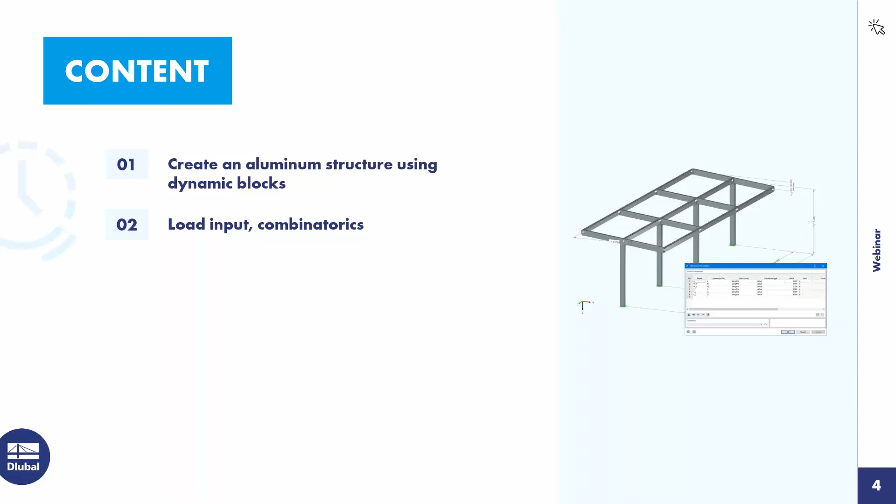I come to the agenda. First point is creating an aluminum structure using dynamic blocks. Then load input and combinatorics. Then the design of the structure according to Eurocode 9. And finally the printout report documentation.

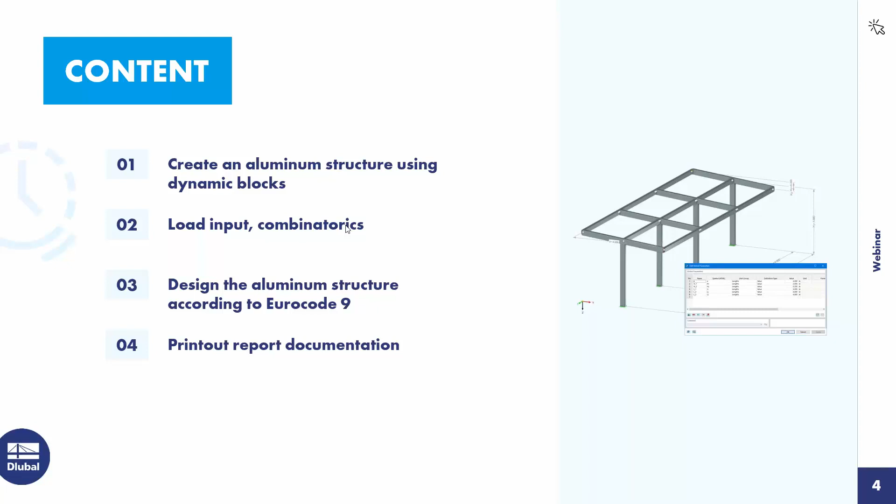Thank you, Andreas. I would also like to welcome you to today's webinar. This construction can be modeled by entering objects in graphic or tabular form directly in RFEM. This has already been shown in detail in previous webinars. In addition, there's also the option of saving object groups as a block and then reusing this block.

In RFEM, 3 block types are distinguished: non-parametric blocks, parametric blocks, and blocks with JavaScript. I would like to introduce you to all 3 block types.

In the case of a non-parametric block, the structure has been created without parameters. The model that you see here was created this way. Here the node coordinates are defined by values; no formulas are used.

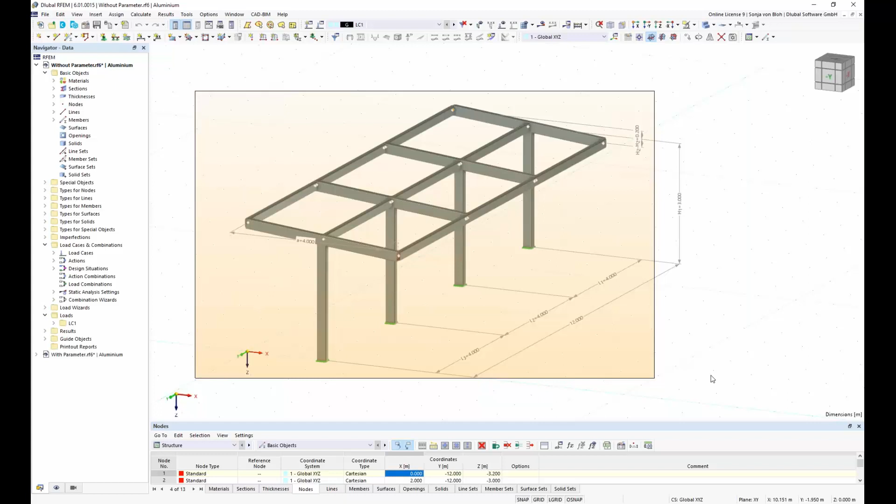In order to save the structure or partial structure as a block, it must first be selected. I want to save the entire structure as a block, so I select the entire structure. Then I go to File and then Save as block. Here I have to enter the name and I also have the possibility to do a classification.

The classification is used as a filter so that I can find the block more easily. A few categories have already been created. Here I choose the category beams.

The block can now be inserted into any file. I insert the block into the same file. For this, I open the Dlubal Center blocks that manages these blocks. Here many blocks are included. You can see here the beams, then you can use the tower and masts and so on for your daily work.

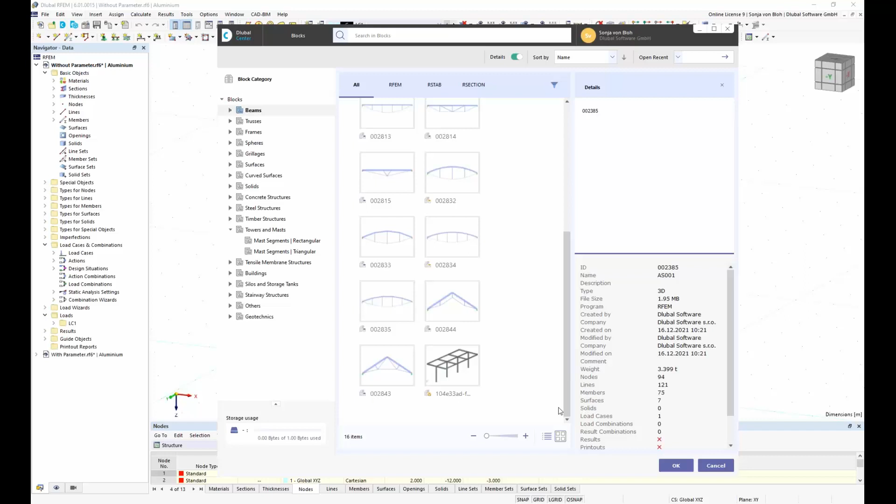I first switch to the filter in which I saved the block, and then I select the block. I find it here. Then I go to OK.

In the main tab, I can set the insert point of the block by choosing the node in the graphic, or I can choose the node in the drop-down here. Then I can define the position of the insert point. If I write the coordinates here, I also have the possibility to pick this coordinate in the RFEM work window.

In the Structure tab, I can change the material, the section, and nodal support. This information was read from the construction which I saved as a block. If I want to change the section, for example, I can click on the 3 points here. This opens our section database, and I can use any section included in this database.

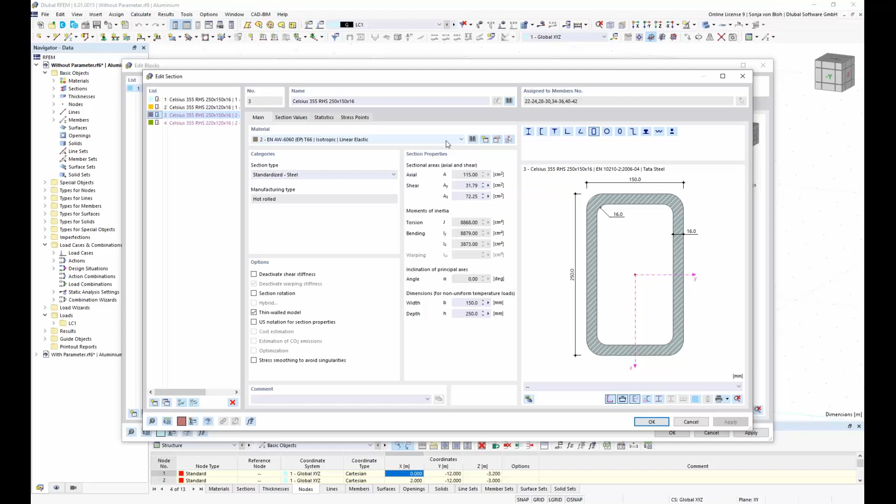I now click OK, and the block will be inserted into the file. The block reference is not lost; I can edit or convert the block to normal geometry.

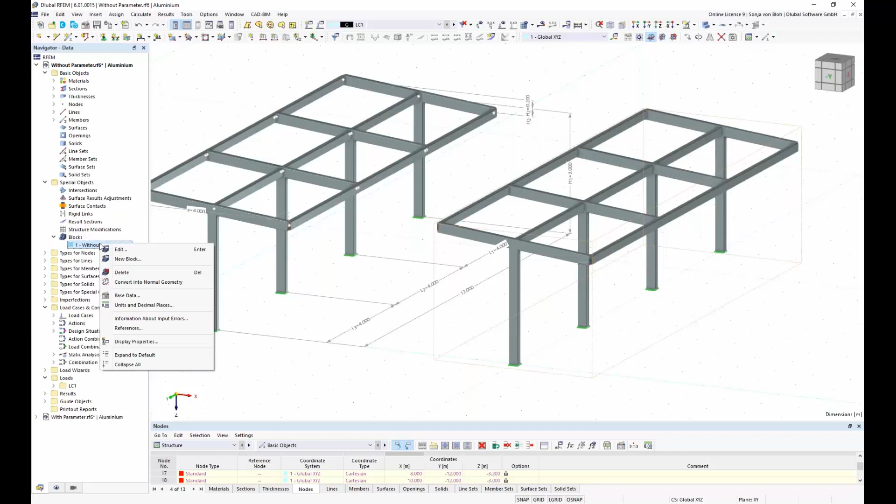I find the block here in Special Objects, blocks without parameter, and if I want to edit this block, I choose the Edit button, where I can edit the coordinates or the structure. If I change the coordinates to 15 meters, the block will be moved, as you see here. There's also the possibility to use this function directly in RFEM, moving the block by drag and drop.

That's all to the blocks without parameters. In the case of a parametric block, the construction has been entered in such a way that the structure depends on parameters. I've prepared such a model that you can see here. In addition to the geometry, loads can also be parameterized. The parameters can be set in the global parameters window.

Here I have already created the lengths A, H1, H2, L1, L2, and L3. They have the unit group lengths, but I can choose another unit group as well. Here you have forces and moments and so on if you want to use parameters for forces or for loads. Then I've selected the definition type value. You have here also the possibility to use formulas.

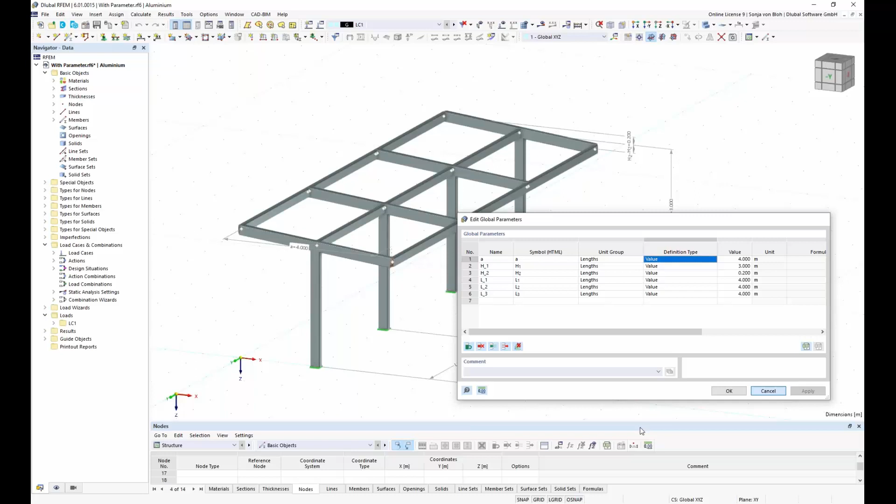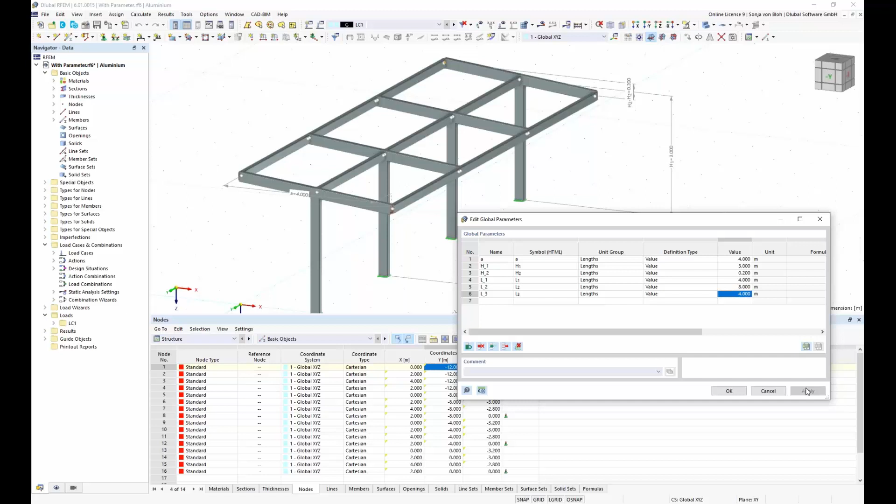I have defined the coordinates using these parameters via a formula. You can open the formula if you click on this symbol here. And here you can see the node coordinate y is calculated as minus L1, minus L2, minus L3. If I now change the parameter, then the structure will be changed. I can change it also back.

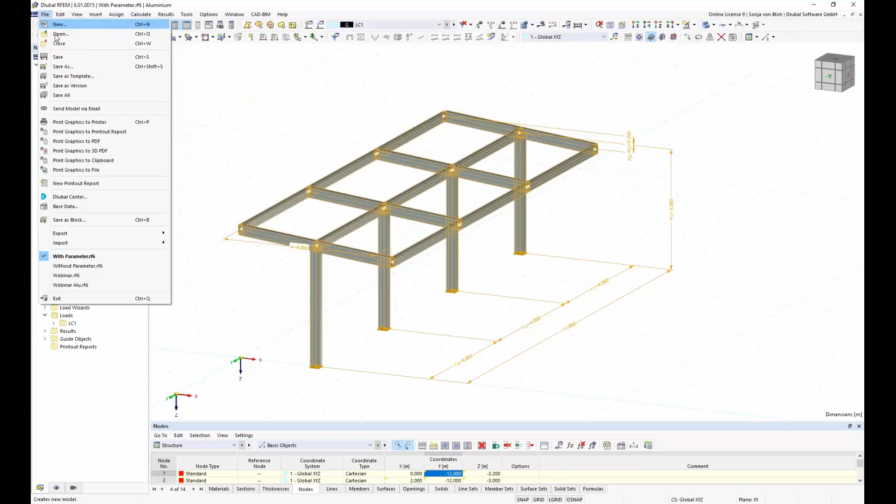If I now want to save this structure as a block, I have to select the structure again. I want to save the entire structure, so I select the entire structure. Then I go to File, Save as Block, give it the name with parameter and also the model category beams. Click on OK. And then I will insert this block into this file.

For this, I open the Dlubal Center blocks. And in the filter beams, I find this block. And in the main tab, I can do the same things like in the other block. I can choose the insertion point. And then I go to the structure. Here I have the same possibilities like in the other block. I can choose the material, the cross-section and the nodal support.

But in addition, I have also the global parameters that I have defined in the structure before. And here I can change these lengths as I want to. I click on OK. And the mapping to the global parameters is lost. If I insert this into the file, I can see this if I change the global parameters. Click on OK. Then only the structure with the global parameters will be changed.

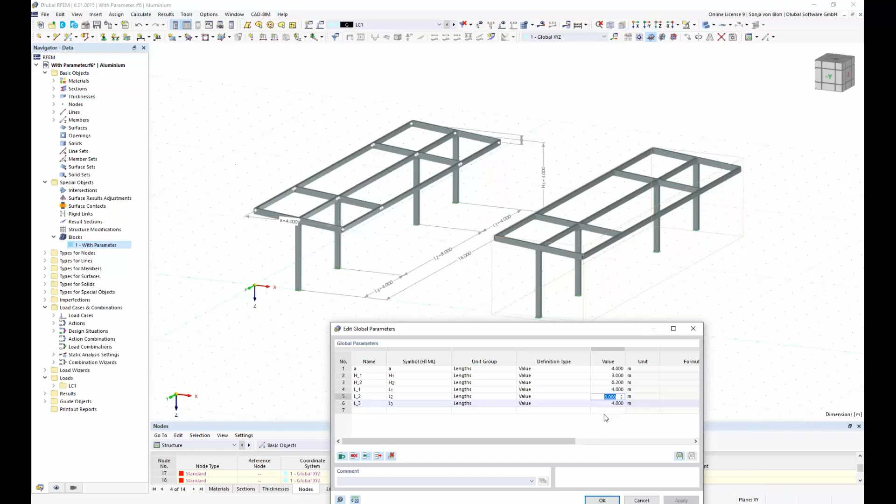Not the structure that I've saved as a block, but you have also the possibility to edit the block parameters in the structure tab. In addition, it's also possible to assign the global parameters to the block parameters. If I define it here as equal A, equal H1, equal H2, equal L1, equal L2 and equal L3. If I now change the parameters, in both structures, the parameters will change.

However, with the parametric block, it's not possible to add or delete structure objects within this block. If I saved the canopy as a block with 4 columns, as in the example, I cannot add a 5th column within the block. I can add this in RFEM, of course, but this possibility to create dynamic blocks is possible with blocks that use JavaScript. This brings me to the third block type, blocks with JavaScript.

With scripting, I can create the topology, the load cases, and the loads. For the creation of script files, you only need an editor like Notepad++. I created a JavaScript file to generate the canopy presented earlier. The 3 main functions, global parameters, input data, and generate, are available for defining blocks. I only used the input data that you can see here and the generate function in my script. The global parameter function is not used in my script file.

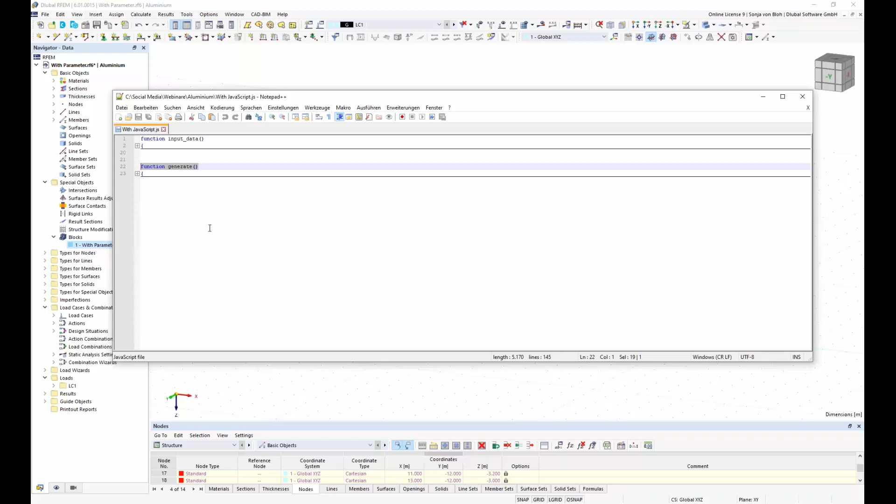The global parameters function is used to create global parameters, which, as I have already shown, can also be used in the blocks. The input data function is used to create the input table in the block dialog with input parameters. Here I show this function. In the input data function, a category can be created in the block's input table using the category function. This is this here. Here I've created the categories basic data, geometry, supports, and sections.

In the basic data category, I then use the parameter int function, this is here, to create an input parameter n of type integer. This is used to dynamically generate the number of bays. In the category geometry, I create the input parameters A, H1, H2, and L with the function parameter float. The parameter L is created dynamically via the multiplicity counter key n. This is this here, which I defined above in the parameter int.

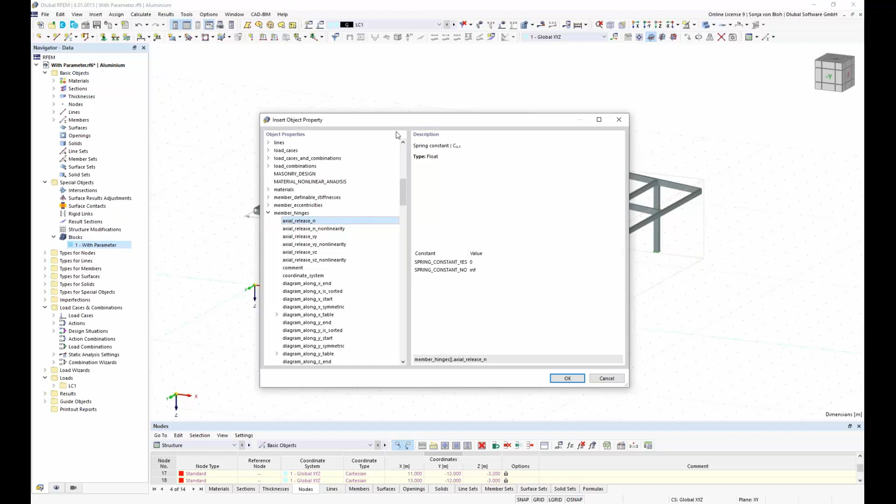The nodes are created here. Also the members and the supports, the nodal supports. And here I also create in this function generate the dimension here with linear dimension.

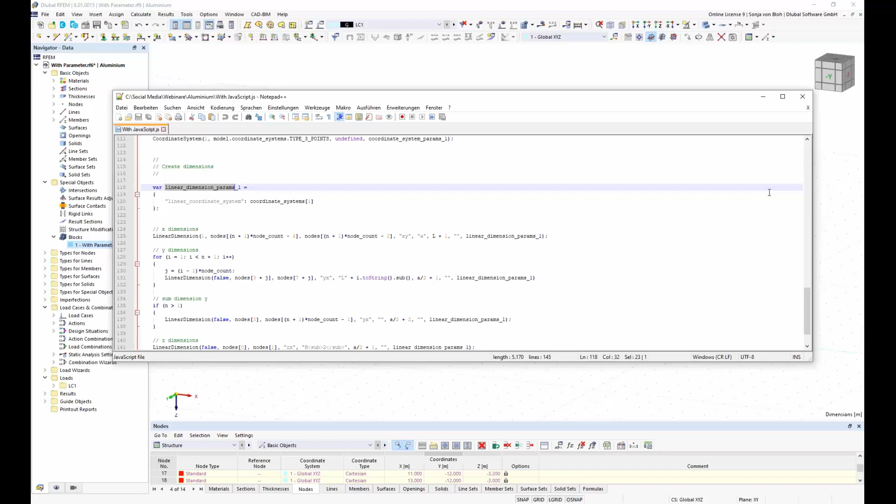A documentation on the blocks with JavaScript will be available later on GitHub. To create the block, the function for creating a block can now be called in any RFEM file. The file content is only used to create the image in the Dlubal Center blocks and has no other function.

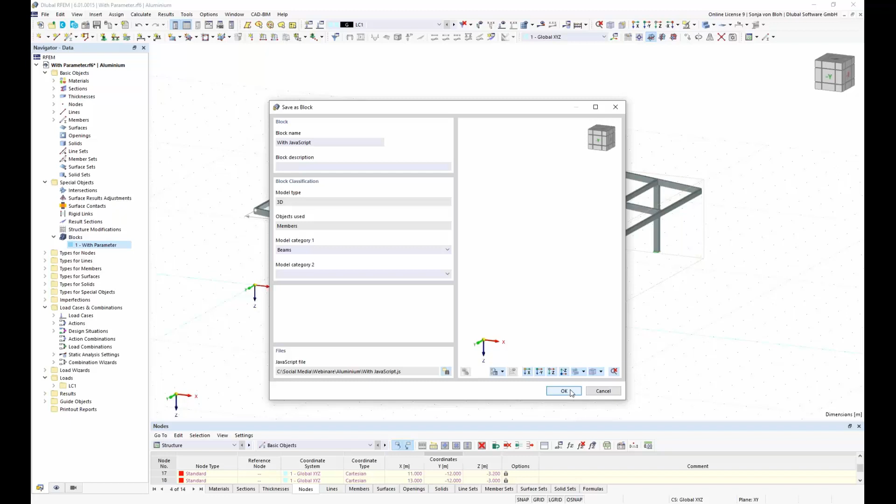I first go to File, Save as block, and then I call this block with JavaScript. I choose the model category beams, and here I have to choose the JavaScript file. Then I click on OK. If I now open the block,

you have also the same option in the main tab, and in the Structure tab, you have here the number of bays n. And here I have predefined 3. That means you have 3 bay lengths that you can see here, L1, L2, L3. And to make this dynamic, I can choose here also 5. And then you can see this has changed to input L1, L2, L3, L4, L5. Okay.

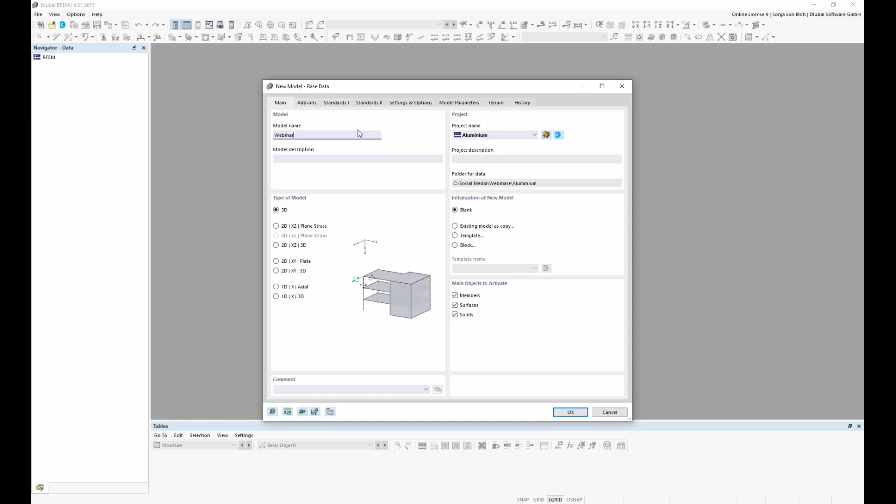This brings me to the creation of the model of the webinar. I close this file and I create a new one with File New. In tab Main, I define the model name with Webinar. I choose type of model 3D, and then I go to the tab Add-ons. Here I can select the add-ons that I want to use in my model.

A green dot in front of the add-on indicates that a license is currently available for it. An orange or blue dot indicates that the add-on can only be used in demo mode or as a trial version. I select the aluminum design, and the 2 checkboxes, Combination Wizard and Load Wizard, are activated by default. This uses the Combination Wizard and the Load Wizard to combine load cases and to generate wind and snow loads.

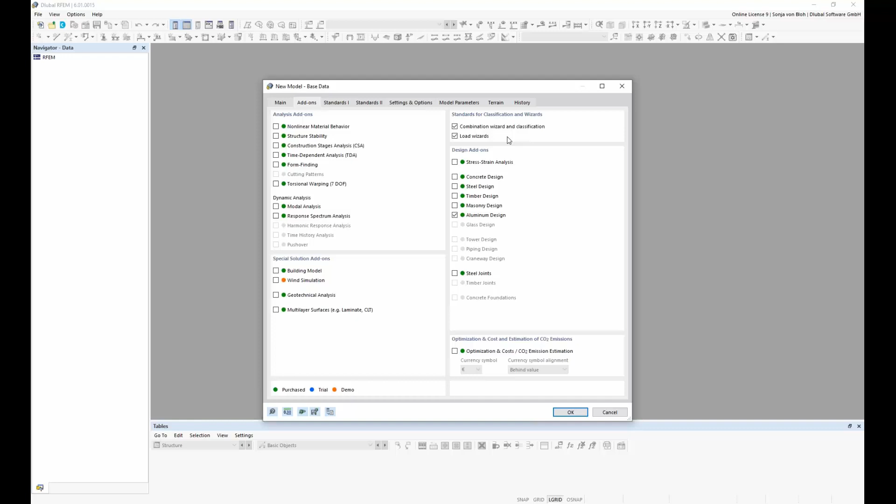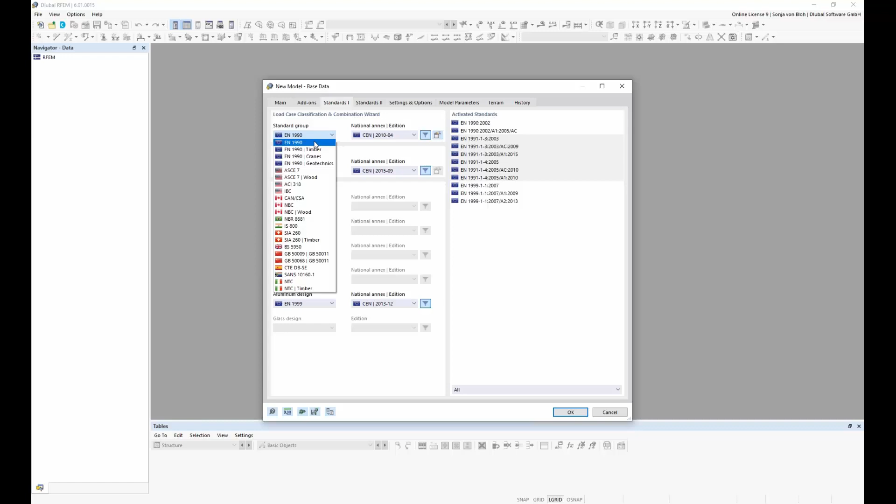Then I go to the Standard tab. Here I specify the standards for the load case classification. I have here several standard groups for my choice. Here I select the Eurocode 1990 and the national annex from Germany. For the load wizard, you have also several standard groups, and here I also select the German national annex.

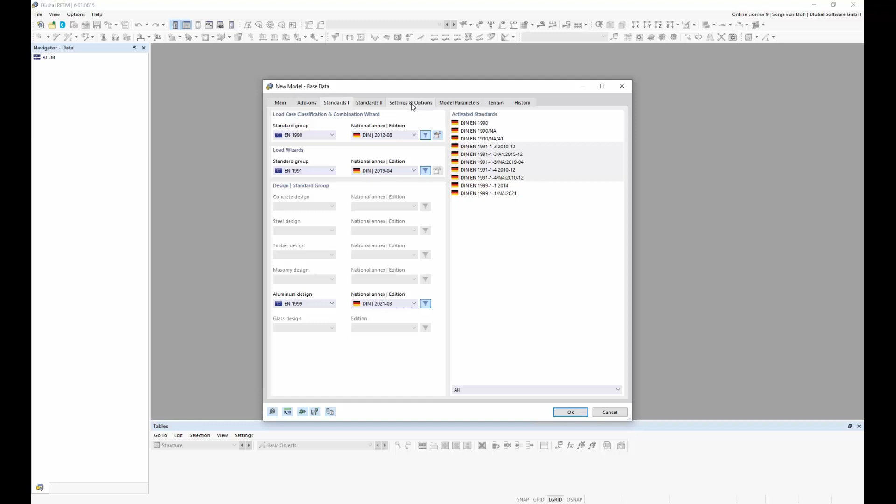For the design of aluminum, I have 2 possibilities. I can use the Eurocode or the American standard ADM. Here I want to show the Eurocode also with national annex from Germany. General information such as acceleration of gravity and tolerances can be specified in the Settings and Options tab.

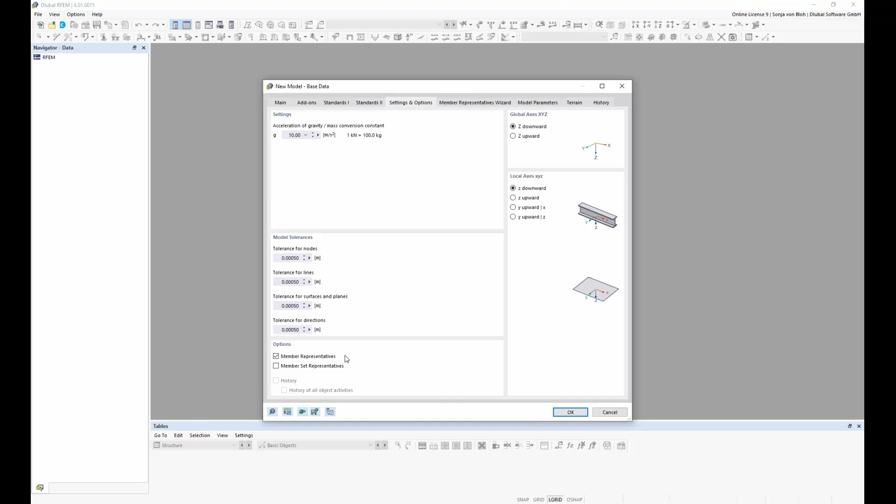Here I activate the member representatives. A member representative is a sample member with identical properties. The settings for the member representatives can then be made in the member representatives wizard. RFEM checks all members for similarities with regard to the activated criteria and outputs the result as a list.

I can then assign properties such as effective length via the member representative, which defines these properties for all members of this member representative. This means I don't have to assign these properties to each member individually. Furthermore, I can easily find members with the same properties via the member representatives.

Then I go to the tab Model Parameters. Here the geographic position of the model can be specified and information about the model can be entered. I want to assign a location here. To do this, I click on the 3 dots here. And here I have to enter the location. I choose our company headquarters. That's located Am Zellweg 2 in Tiefenbach.

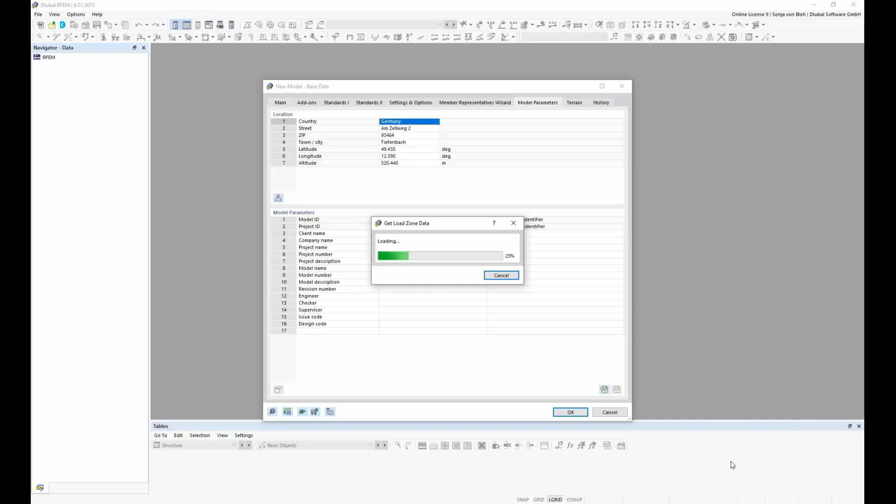And then I can confirm my choices with OK. And the load wizard for snow loads and for wind loads then uses the load values of the specified location. And I click on OK. This will create a new file. And to create the model, I insert the block I created earlier.

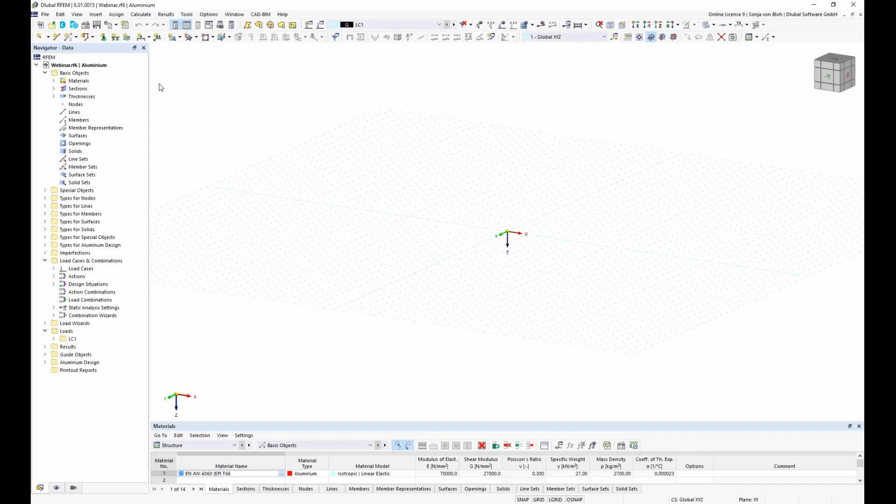For this, I open again the Dlubal Center blocks, go to the filter beams, and choose my block with JavaScript. I then click on OK. I choose the insertion point numbers 16, and I define the x coordinates in 2 meters.

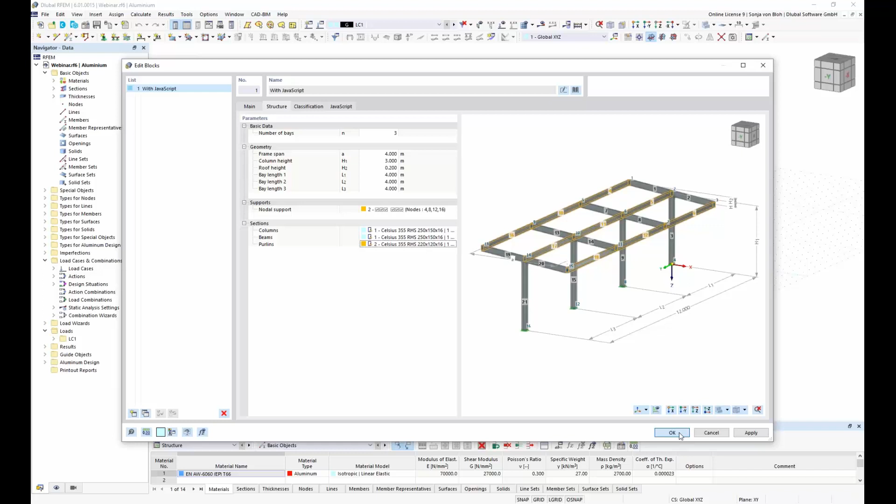Then I go to the Structure tab. Here I choose a different nodal support. Here I choose this type. And for the purlins, I choose a different cross-section. The model has been created so far, so that I can now create the load cases.

The load case LC1 is automatically generated. That's a load case self-weight. And the active self-weight checkbox is already activated here, so that the self-weight of the structure is automatically generated as a load. In the static analysis setting here, I can select which calculation theory should be used to analyze the load cases.

Analysis types are already preset for this. Here I have the analysis according to first order, second order, and third order. If I don't find the static analysis settings that I want to use, I can create a new one, or I can edit the settings here in the Edit Static Analysis Settings window. Here I choose geometrically linear.

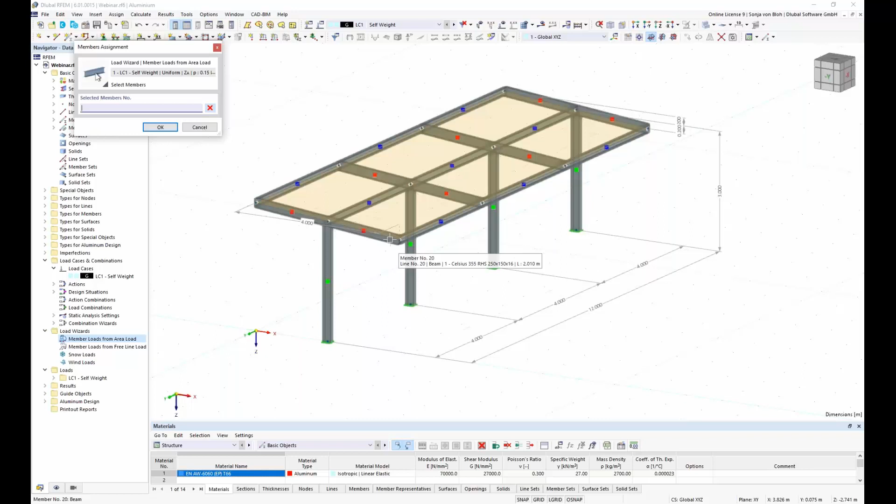Then I go to the next tab, and here I have to define the load plane. For this, I select the corner nodes in the graphics with this function. And then I click on OK. Furthermore, I can specify here which member should be excluded from the load application. Here I choose members parallel to the beam. And then I click on OK.

The load can also be displayed separately with this function display separately for control purposes. Here you can see the load distribution. Okay, the load is okay. And then I define the next load case. Here with new load case, I want to define a snow load. So I give this load case the name snow. Then action category should be snow. And then I click on OK.

For this load generation, I also use a load wizard, and here we have the load wizard snow load. This load wizard simplifies the task of creating snow loads on members of the model in accordance with standards. So I create here the new snow load, and in tab main I have to choose which roof type I have. Here I have the choice between flat and monopitch and dual pitch roof. I have a flat or monopitch roof, so I choose this option. Then I have to define the roof corner nodes.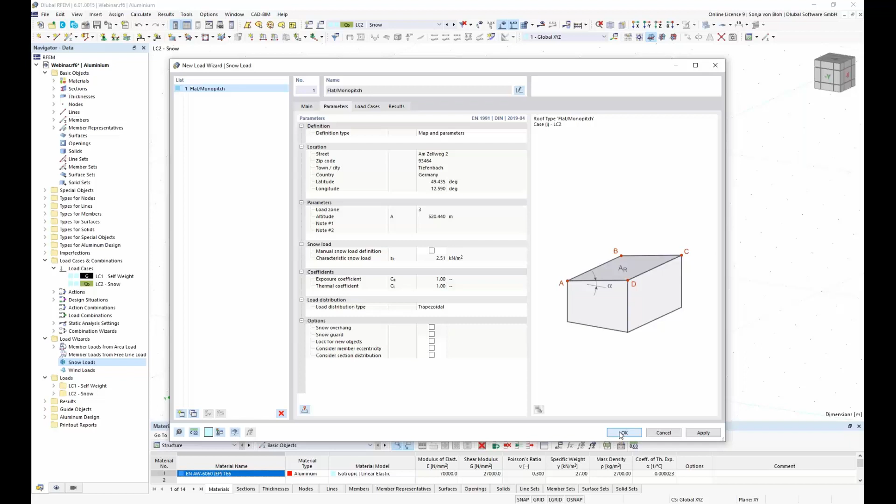Furthermore, I can activate additional options such as a snow overhang or snow guard or something like this, but unfortunately these functions are not yet finished. But I wanted to also consider a snow overhang, so I will define this manually. Then I click on OK. I can also show this load separately, and then I define my snow overhang with a new member load.

For this, I change the load direction to global Z on projected length, and I define here the load magnitude. This should be 0.537 kilonewton per meter, and then I choose the member where this load should be applied on, and I click on OK. Snow load is finished.

So I have to define wind loads, and if a canopy roof like this should be designed, a load determination with regard to section 7.3 of Eurocode 1991-1-4 is required. We have only load wizards for closed buildings that you can see here. That's here the load wizard for wind, but they are only for closed buildings. So I have to apply the load manually or with the help of RWIND. How to determine the load manually is described in the knowledge base article. I want to show you this article here.

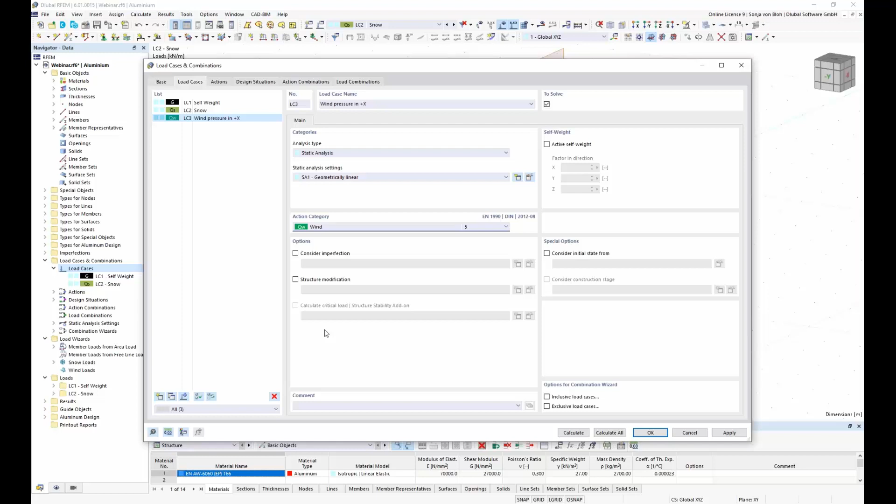Go back to the program, and then I have to create my wind load cases. As an example, I only create the wind pressure and wind suction in +x direction. According to the standard, further flow directions and frictional forces according to section 7.5 would have to be taken into account, but I'm neglecting it here. So I create a new load case. Wind pressure in +x with action category wind, and then I click on OK.

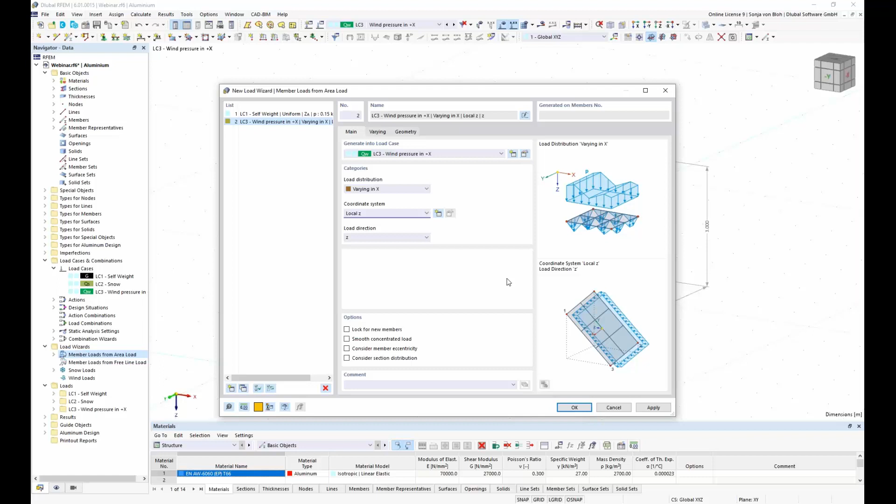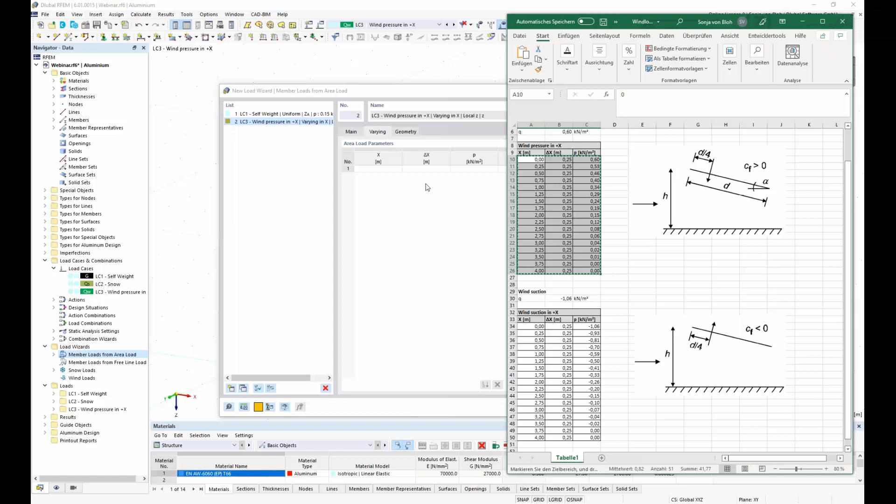Then I use the load wizard member loads from area load, and here I choose the load distribution varying in x, and I want to apply the load perpendicular to the load plane, so I choose here local Z, and then I go to the tab varying. Here I have to define the area load parameters. I've calculated it before with Excel according to the technical article I have shown you before, and here I copy the load parameters and paste them here.

Then in the geometry tab I have to define the boundary of the area load plane. For this I choose my 4 corner nodes, click on OK, and I don't want the load to be applied on the members, so I select the member and then I click on OK. I can also show the load here as area load. Here you can see the parabolic distribution of this load. The second load is the wind suction in +x direction. For this I copy the wind pressure in +x direction.

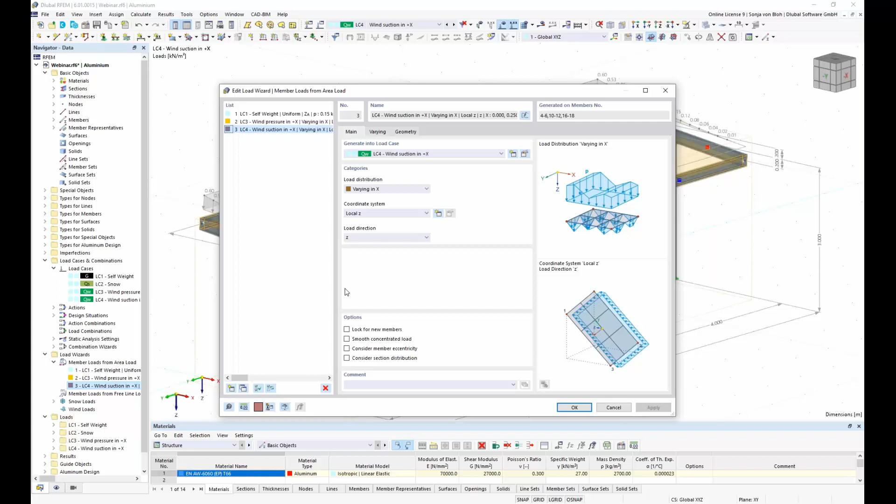I rename this load case. This is now wind suction. Click on OK. And I only have to change the parameters in the member loads in tab varying. For this I copy the wind suction parameters. And click on OK. OK.

Wind loads are finished. In a stability analysis, I determined that the influences from second order theory must be taken into account. How such a stability analysis can be done has already been shown in previous webinars. So I have to generate load combinations according to the second order theory, and I have to apply global imperfections. For this, I create the imperfection case, imperfection in plus x.

We go here to imperfection and then new imperfection case. This should be my imperfection in plus x. Here I choose the imperfection type local imperfection. There are many more imperfection types. And the option assigned to all load combinations without assigned imperfection case is already activated.

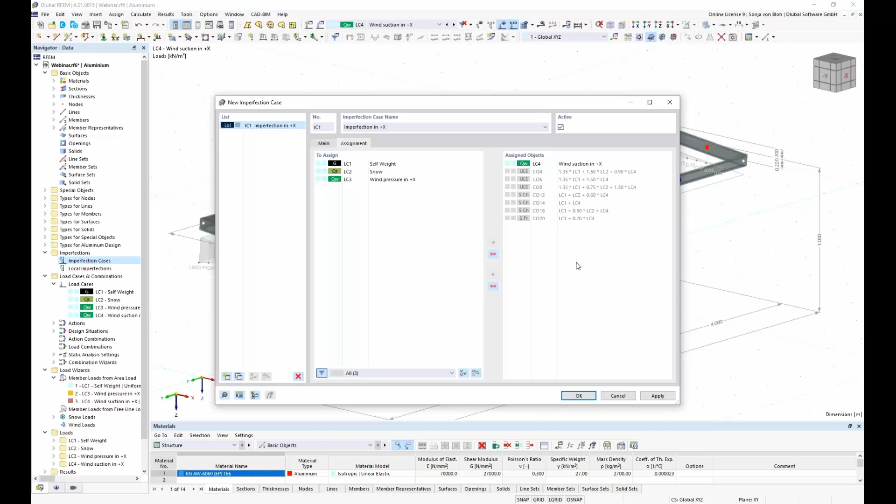For example, if only the imperfection case, imperfection in plus x, with the load case wind suction in plus x is to be taken into account, then I have to move this load by double-clicking it to the assigned object, and then I have to deactivate the checkbox, and now I see the results. It's much smaller. I don't want to do this today. I want to assign this imperfection to all load combinations, so I activate the checkbox again.

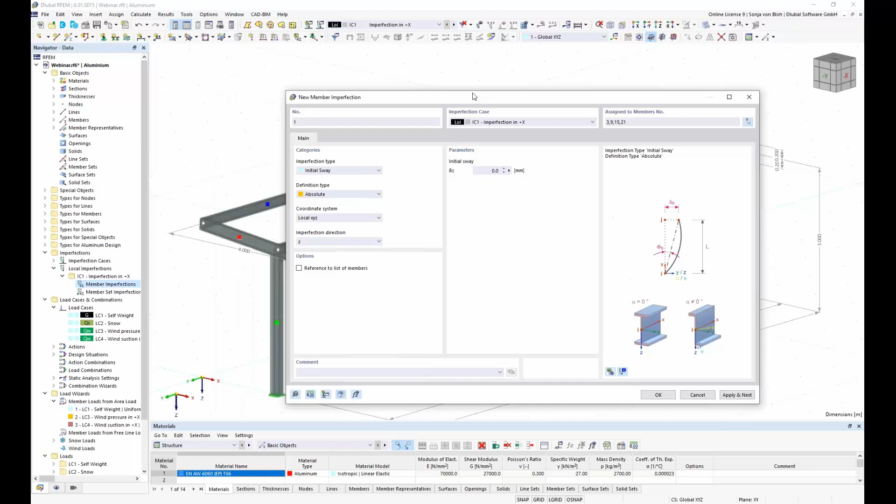Okay, now I have to define the local imperfection. For this, I create a new member imperfection. I choose the members where I want to apply the imperfections. And then I have to choose the imperfection type. Here you have the possibilities: initial sway, bow, and so on. I choose here initial sway, and you have many definition types.

I want to define the imperfection according to a standard, so I choose the standard, and I have to define the imperfection direction. If you want to see the directions, you can click here on this button, and then you can see the result. And I want to assign this imperfection in plus x direction. This is the local z direction here in this case.

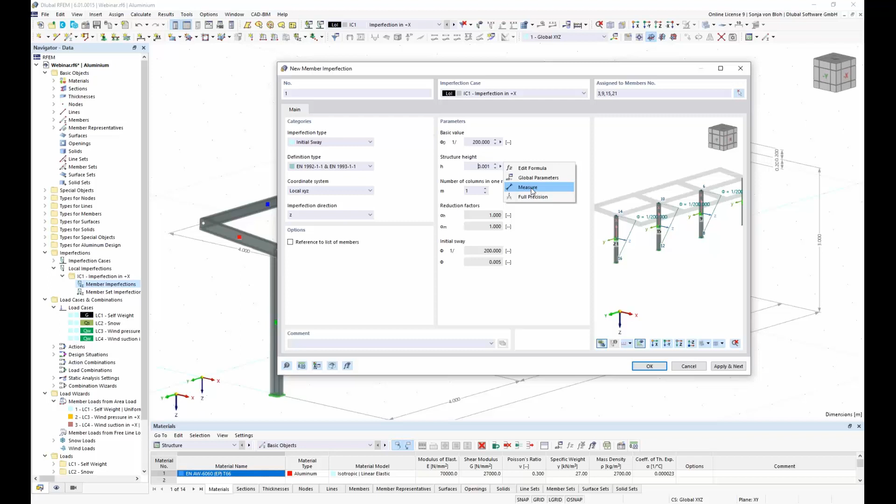Then I have to define the structure height. I will measure that from the column. And the number of columns in one row is 1 in this direction. So I click on OK, and the imperfection is created. I can show this with this button here.

The other imperfection will be created by copying this imperfection. So I click here on copy selected imperfection, it's the imperfection in minus x direction. I click on OK. Then I only have to change my imperfection direction to -z. Here I can see the results.

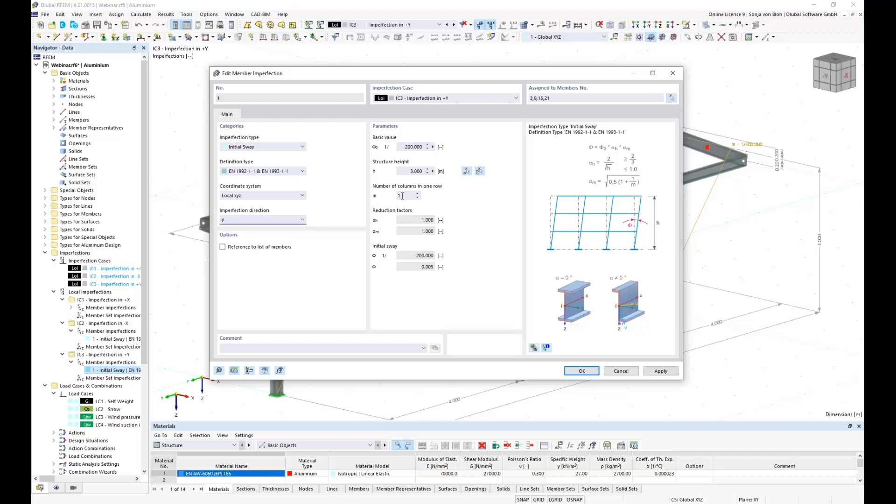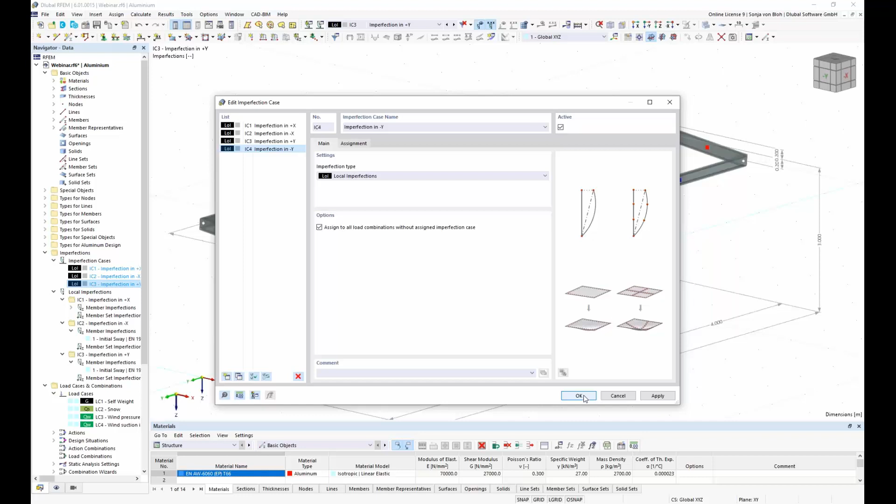Then I need an imperfection in plus y. Here I have the imperfection direction y, and in this direction I have 4 columns, so I choose here 4 and click on OK. Last imperfection is the imperfection in -y. Okay. Okay.

Now the imperfections are complete, my load cases are complete, and so I can make settings for the combinatorics. For this, I go to the load cases and combinatorics, to the combination wizard. I'm defining here the second order analysis, and then I activate the checkbox generate same load combination without imperfection case, and that's all I want to do here.

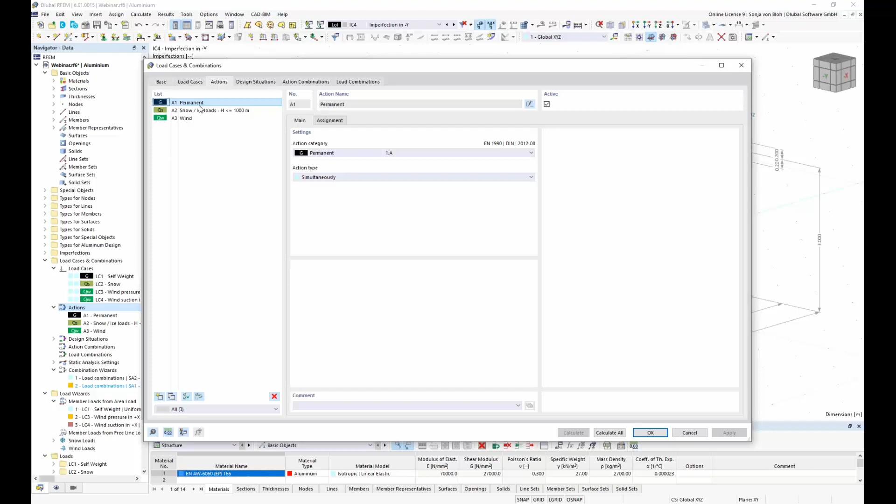Okay. Furthermore, I make settings for the actions. For this, I open the Action tab, and the action category corresponds to the category of the corresponding load case. For action category permanent, I have here assigned the self-weight. For the snow loads, the snow. For the wind loads, the wind.

And the action type controls how the load cases of the action are taken into account in the superposition. Here you have the possibility to use the action type simultaneously if the wind loads can act in the same load combination, or alternatively if they don't act together, and they don't act together, so I choose this option here.

Then I go to design situation. The standards describe how the actions are to be combined. And also Eurocode 1990 requires designs of the ultimate limit state and the serviceability limit states, for which specific combination rules apply. This is considered in the program: two design situations that you can see here are automatically generated by default. However, I can also add other design situations.

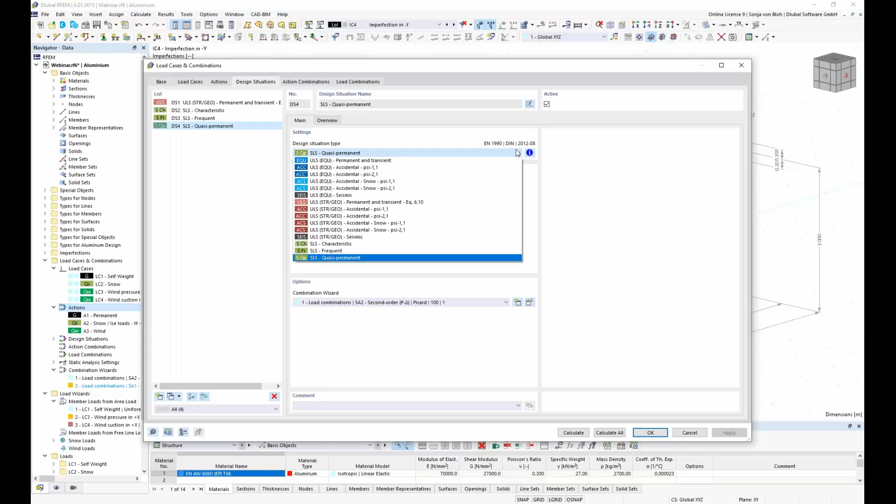If I click here on this button, create new design situation, I can also choose the design situation type that I want to use. And on the info button, you get information on the combination rules of this design situation type. Okay.

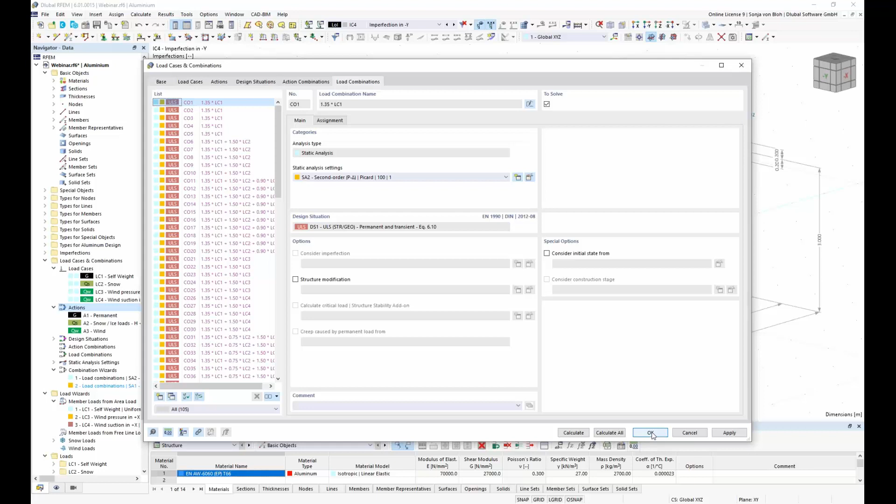Then I go to load combination. That generates my load combination here. Static analysis settings are second order. That's what I wanted to have. So the combinatorics are okay now. So I click on OK, and then I have to make my aluminum settings.

And this I want to do with the member representatives, and RFEM has detected 3 member representatives. These member representatives are colored with this quadratic symbol here. It's here the green one, the red one, and the blue one. And these are the columns, the beams, and the purlins.

I can give these member representatives also a name. And so I double click on this member representative. I can give them a name. I name this member representative columns. And the first one, I name it members. And the third, purlins.

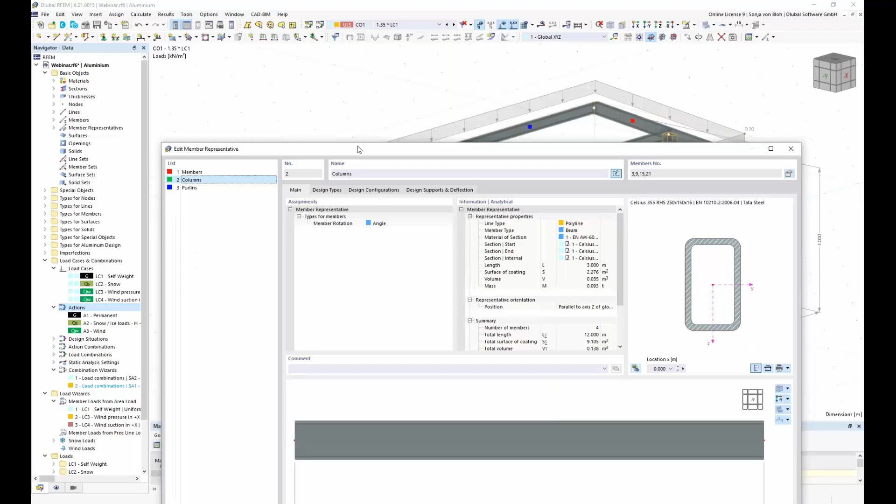Okay, then I go to the tab design types. Here I have the possibility to define effective lengths, local section reductions, shear panels, and rotational restraints. And first I create a type for the effective lengths for the design of the columns. For this I click on create new effective lengths.

First, it must be specified which forms of stability failure exist for the member. According to Eurocode 9, the possibility of torsional or lateral torsional buckling for hollow sections can be neglected, so I deactivate the checkboxes torsional buckling and lateral torsional buckling. However, these checks are performed by default. In the ultimate configuration, I can also make other settings for this. I will show the ultimate configuration later.

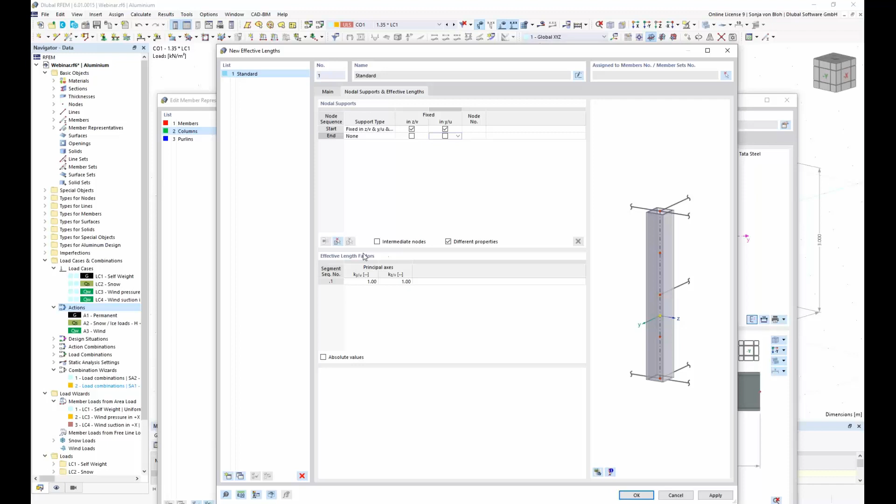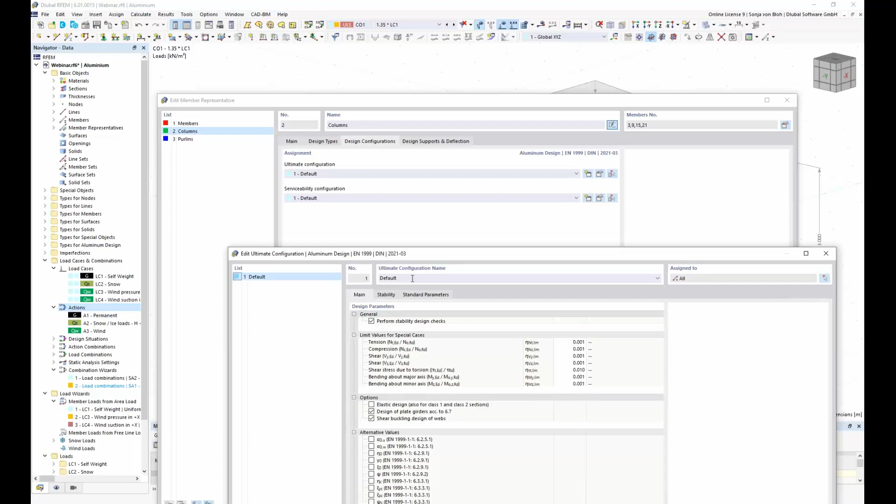Then I go to tab nodal supports and effective lengths. Here I define my nodal supports and the effective length factors. This is okay. And I'll start by looking at the ultimate configuration in the design configuration tab. Here I go to edit and I name this ultimate configuration columns. And here the stability design checks are activated.

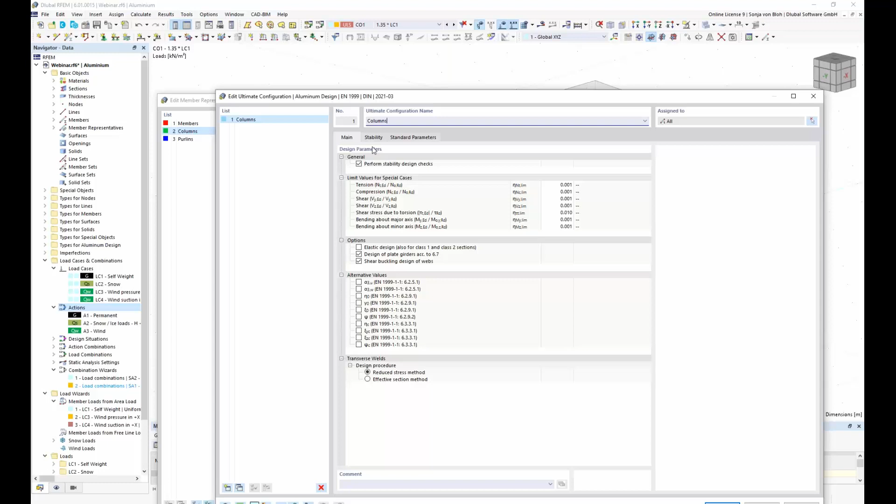Here you have the possibility to define alternative values that are described in the standard, or here you have the possibility to perform the design for sections like hollow sections that I mentioned before if you activate this checkbox. Okay, go on OK.

If no design configuration is assigned to an object to be designed, then no design checks are carried out in this configuration for this object. I don't want to do a serviceability check of columns, so I don't choose a configuration here. Then only the ultimate configuration will be used, and only the stability checks and cross-section checks will be done.

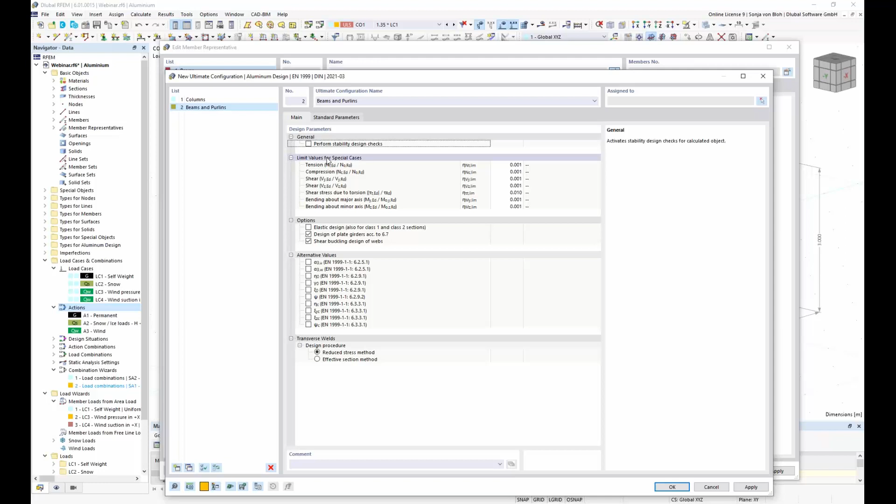Then I go to member representatives. Here I wanted to name this beams. Oops, beams instead of members. And in this member representative, I don't want to do a stability design, so I create a new ultimate configuration. I go here, and I name this beams and purlins, and here I deactivate the checkbox perform stability design checks. Then I click on OK.

Then I want to see my serviceability configuration. For this, I click on Edit Serviceability Configuration to open this window. And in the serviceability configuration, the limit values to be checked for the design can be specified. The deflection limits are defined as a fraction of the reference length. A distinction is made between the cases of beams and the cases of cantilever here in this section.

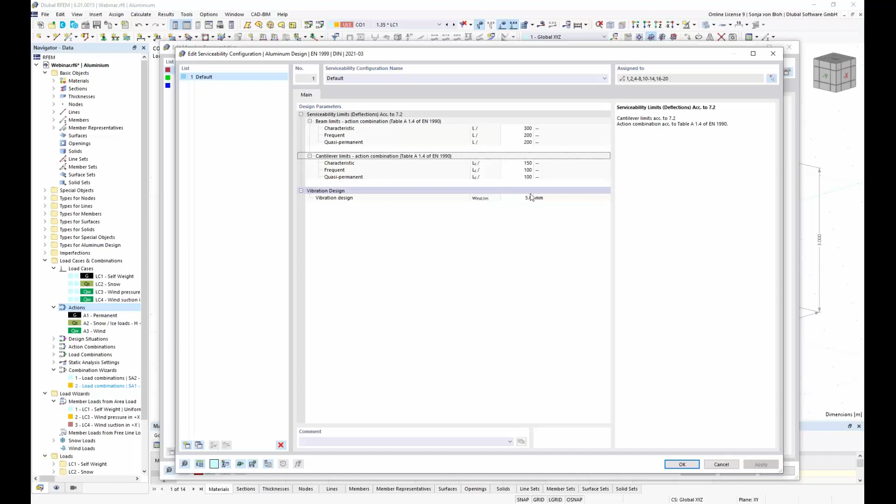Okay. Then I go to the tab Design Supports and Deflection. For the aluminum design, the beam type is derived from the defined design supports. If I define a support on both sides of the member, the type is interpreted as beam. If a support is only defined on one member side, the member type is interpreted as cantilever. Depending on the type of beam, the limit values defined in the serviceability configuration are used.

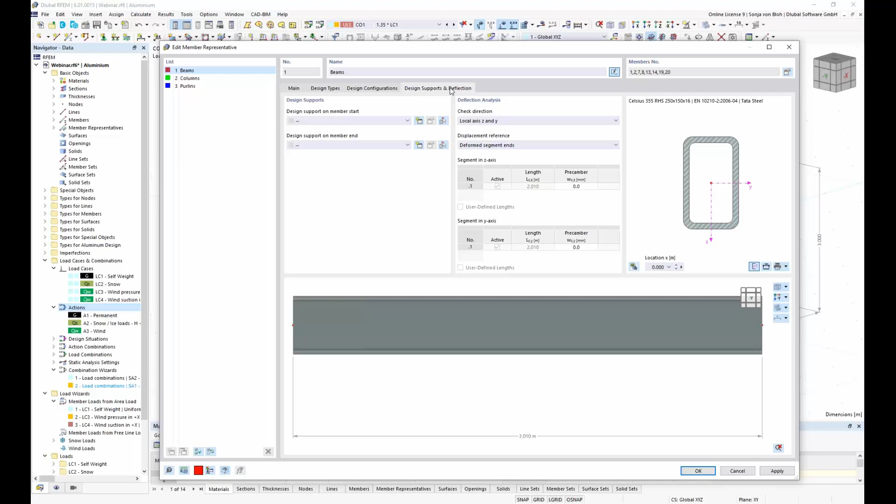Here I have a cantilever, so I only define a support on the member start. For this I click on New Design Support, and here I activate the support in Z-axis. You have here the possibility to define the support width and depth. This has no influence on the design. Then I click on OK.

Then I choose the check direction. Check should be done only in local axis Z. Displacement reference, you have here two possibilities, should be deformed segment ends, and the design supports also take on the function of segmenting the members for the deflection check. Such design supports can be defined at every intermediate node of the member. Depending on the location, you can use this to check different reference lengths for determining the permissible deflection. But I don't have a node here on this member, so I don't use this.

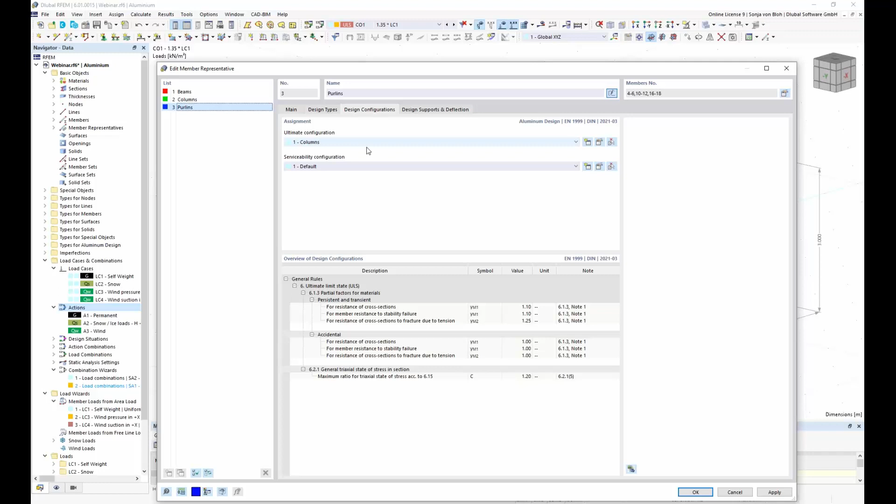Then I go to the member representative purlins. Here I go to design configuration. I want to use design configuration beams and purlins, as I don't want to do a stability check here. And I use the same serviceability configuration.

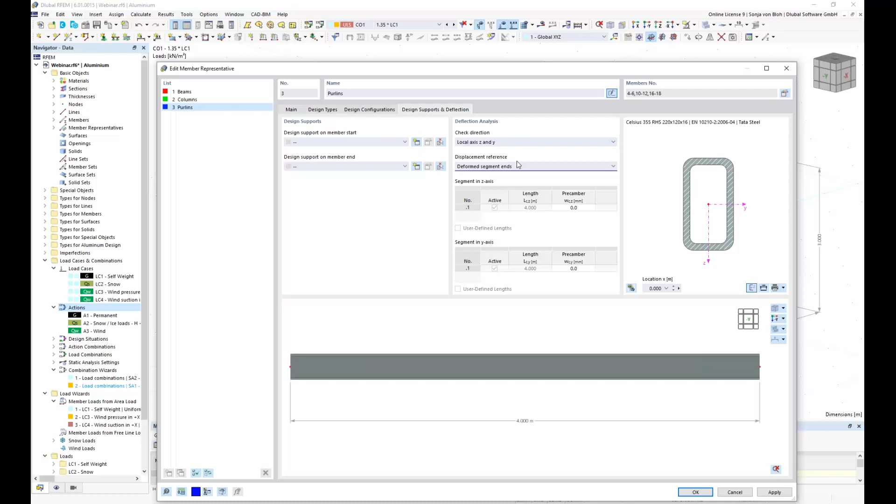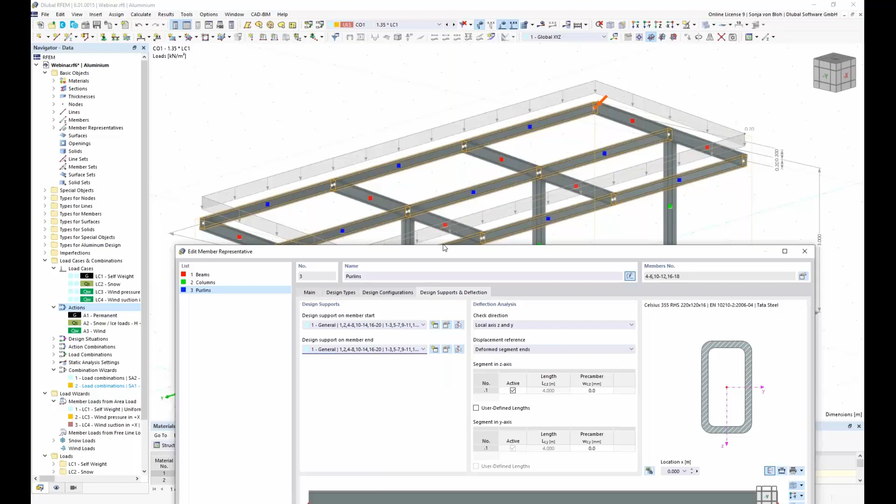Then I go to the design supports and deflection, and in this design, the purlins have supports on both sides of the member, so I use the same design support that I created before. Okay, then I choose also the check direction local axis Z and Y, and I think, okay, now I've defined all things here.

All types for aluminum design can be represented graphically. For this, I open the navigator display, and here you can see the types for aluminum design. Here you have several possibilities.

You can see the member effective length graphically if you activate this checkbox. You can see that's here. Or you can see the member supports or design supports here. This allows easy checking of the correct assignment and clear documentation of the graphic printout.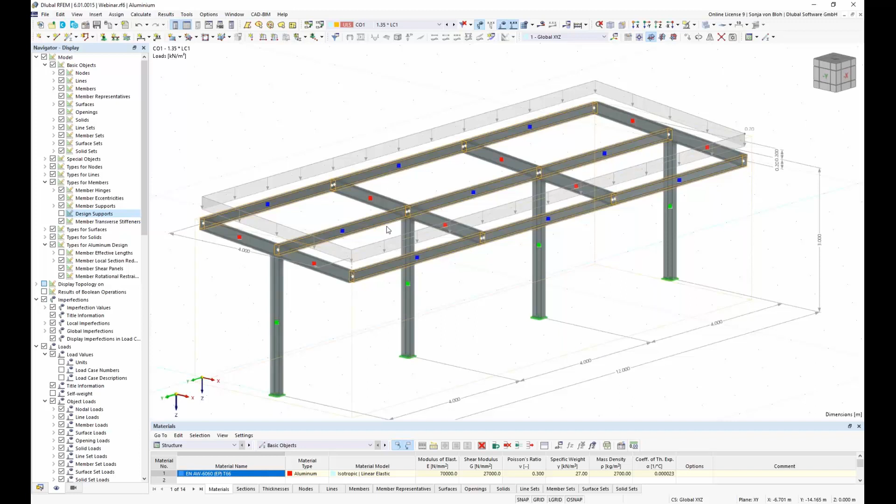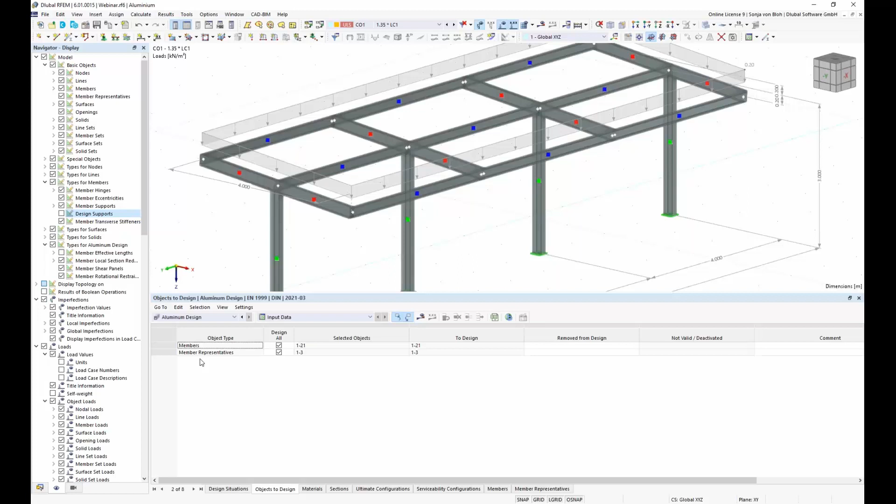I would like to show the other settings in the table. For this, I enlarge the table a little bit. Here you have the possibility to choose the table structure, imperfection, and so on, and you also have a filter for aluminum design. This shows the tabs for the design situations and objects to design.

In the design situations, this table lists all design situations that are listed in the model. Here you can decide whether and how a specific design situation should be taken into account for the aluminum design. I only want to check the first and the second design situation. The other one I don't want to check, so I uncheck the checkboxes. Here you also have the possibility to choose a different design situation type if you want to.

Then I go to Objects to Design. All object types in the model suitable for design and the add-ons are listed as one row in this table, and by entering an object number in the cell removed from design, you can exclude certain objects from the design. I only want to design the member representative, so I deactivate this checkbox.

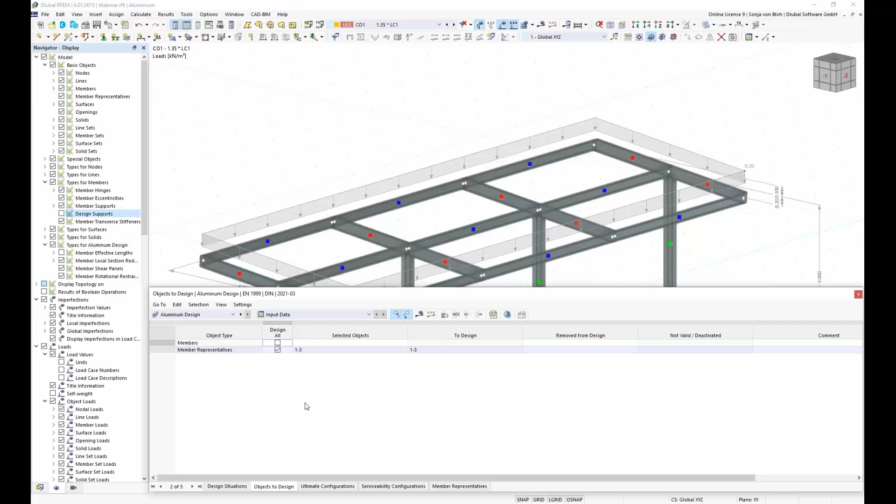So all inputs are ready, so I can start my calculation. For this, I click on Calculate All.

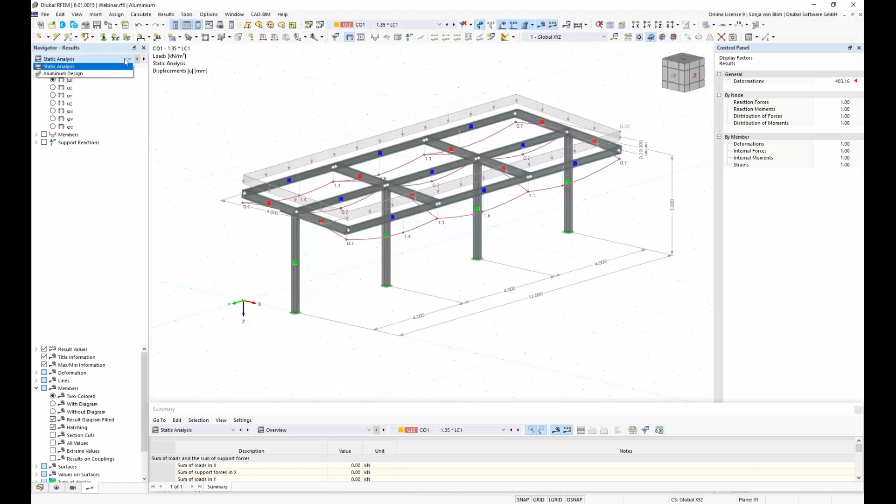After the calculation, you can choose Navigator Results if you want to see the static analysis results or the aluminum design results. If you choose this entry, here you can see the design checks graphically.

The design checks are also output in tabular form. For this, I choose aluminum design, and here you have many possibilities. You can see the governing results or design ratios on member representatives. You have several tabs: design ratios by design situation, by loading, or by material.

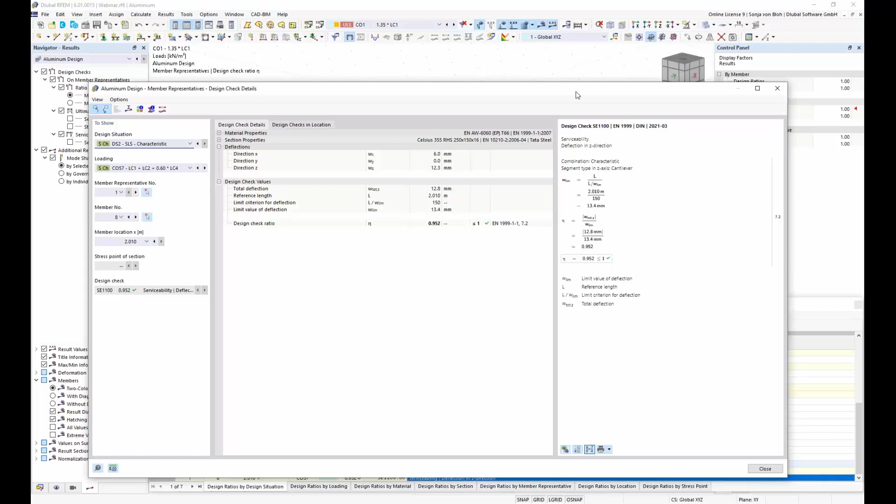You can open the details of the design if you double click on an entry in the table, and here you can see all details of the design, also with formulas. Here you can see this member is characterized as cantilever, and you can see here the design check.

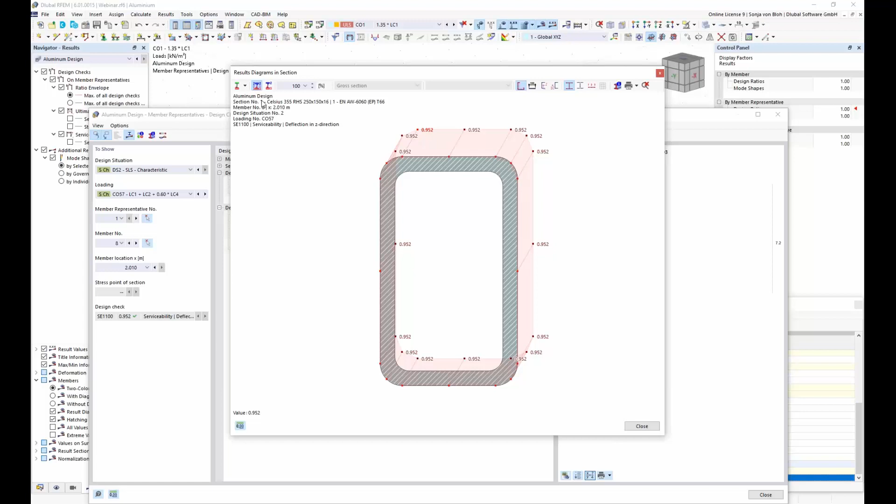Further detailed graphics are also available if you click on diagram and section. Here you can choose the stresses, and then you can see the stresses on the section. It's also possible to show the result diagrams for the static analysis and for the aluminum design. Here you can choose which member representative should be displayed in the tab.

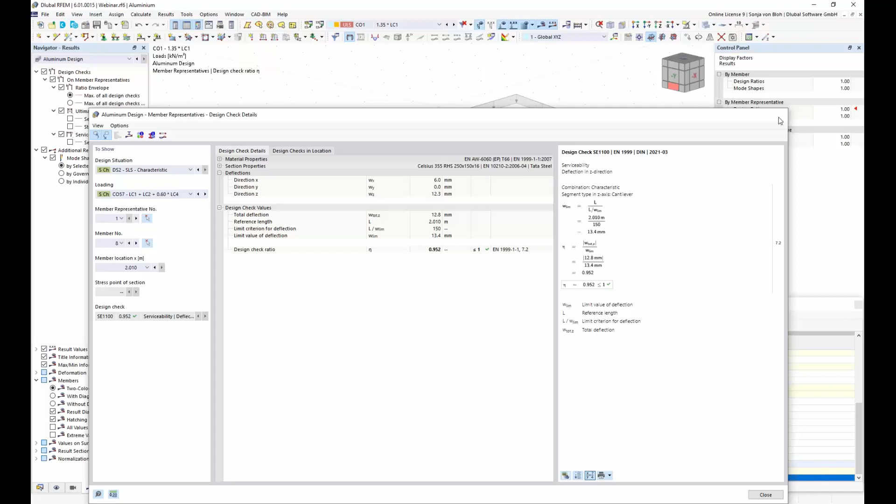Finally, I would like to show you the documentation. The aluminum design add-on is fully integrated into the main program, so the functions of the printout report are available for documenting the input data and results. For this, I go to the navigator data, and then I create a new printout report.

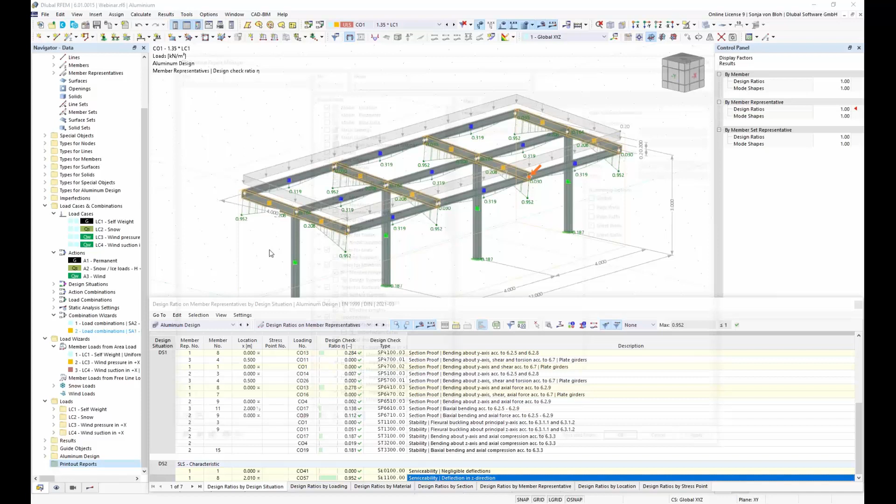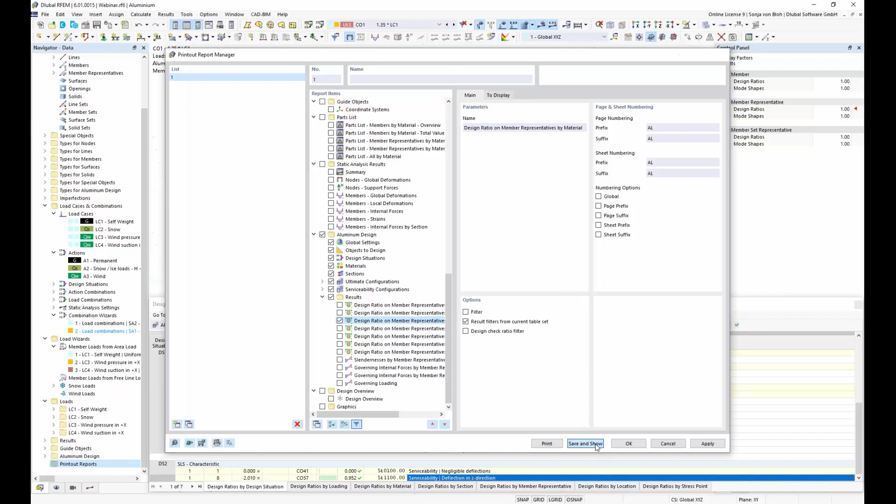In the list you can choose which topic should be included in the printout report. Here I activate all, then deactivate it. I only want to print the aluminum design topics in the printout report, so I check these topics. Here I have additional filter options, and then I click on Save and Show, and then the printout opens.

Here you have the results in tabular form. It's also possible to print graphics to the printout report. For this, I go to Print Graphics to Printout Report, and then I can do the settings in this window.

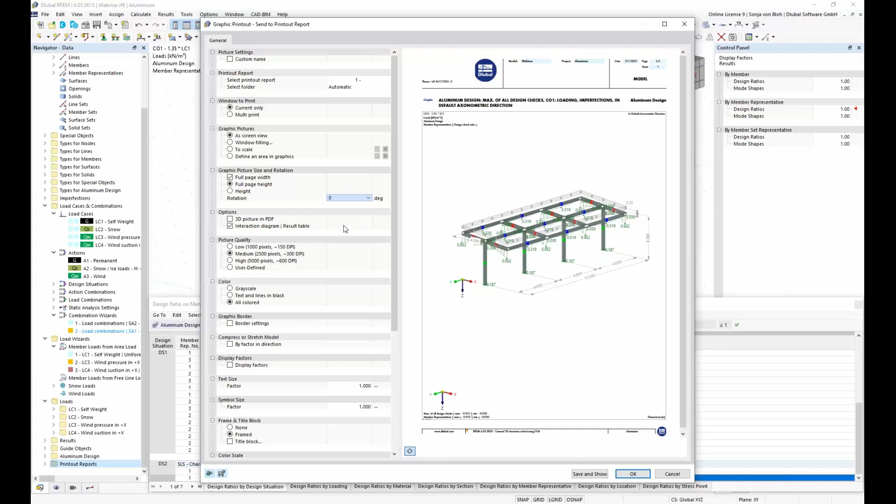For the graphic picture, I want to rotate this graphic, so I choose a rotation of 270 degrees, and then I click on Save and Show.

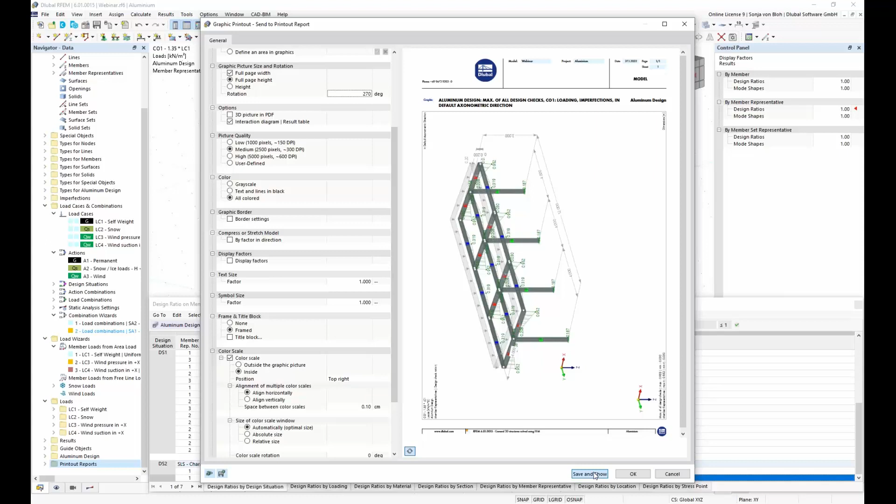With the documentation, I have now come to the end of my presentation. I now give the floor back to Andreas.